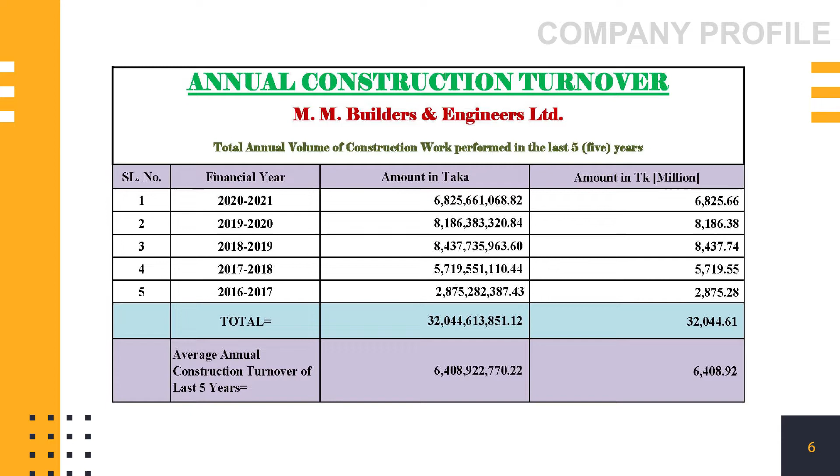Annual construction turnover: total annual volume of construction work performed in the last 5 years was 640 crore 89 lakh 22,770.22 taka, or 6,408.92 million taka. Working sectors include Roads and Highways Department (RHD), Public Works Department (PWD), Local Government Engineering Department (LGED), Bangladesh Bridge Authority (BBA).

Other working sectors: Bangladesh Water Development Board (BWDB), Rajdhani Unnayan Kortripokho (Rajuk), MES Bangladesh Army, City Corporation (CC), Bangladesh Inland Water Transport Authority (BIWTA), Chittagong Port Authority (CPA), Payra Port Authority, and Bangladesh Navy.

Experience of the firm in the field of large construction.

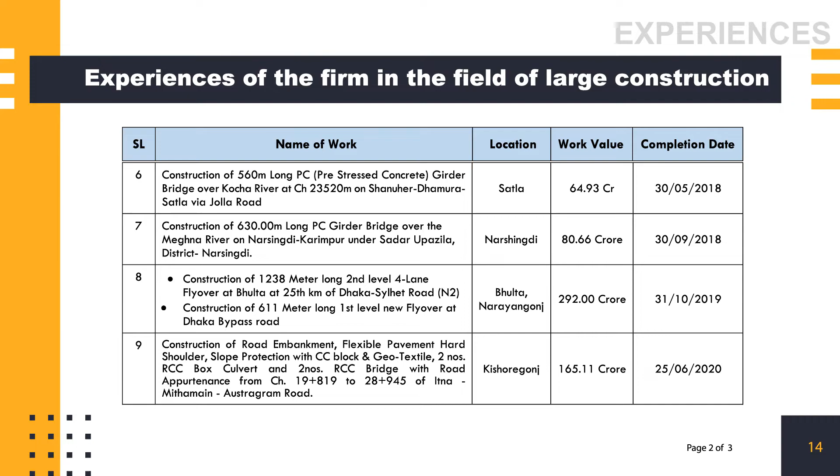Previous experiences for the construction of any types of large or small jetty and related works, including the construction of the damaged RCC jetty at Guptachhara, Sandwip.

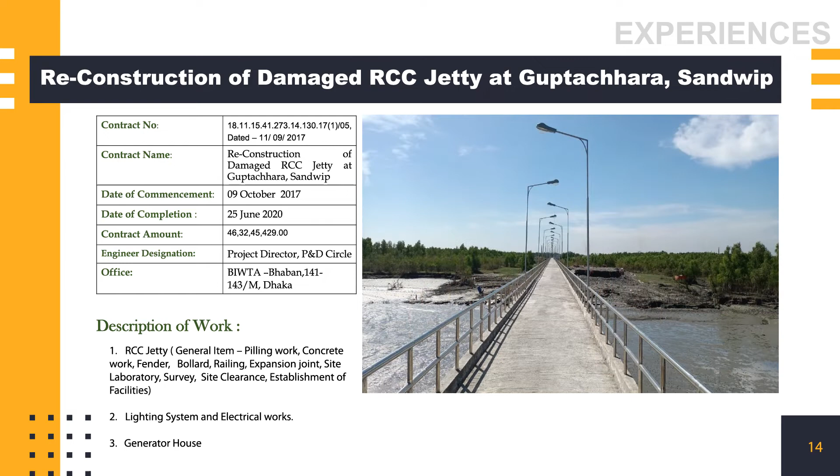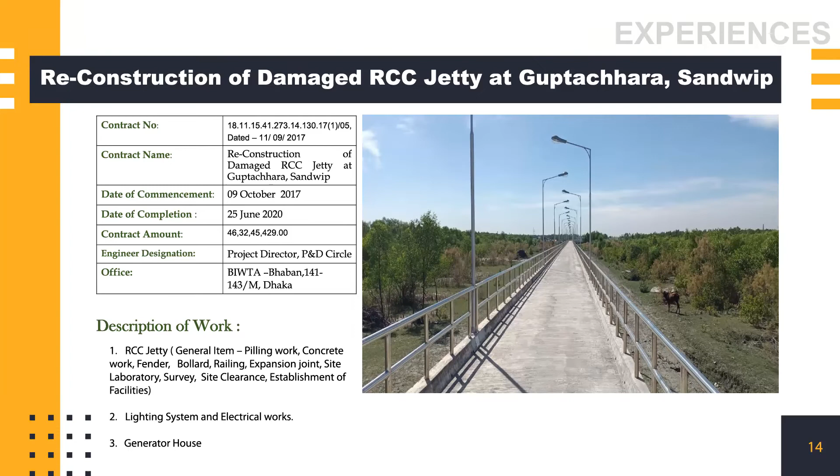RCC jetty works include: general items, piling work, concrete work, fender, bollard, railing, expansion joint, site laboratory, survey, site clearance, establishment of facilities, lighting system and electrical works, and generator house.

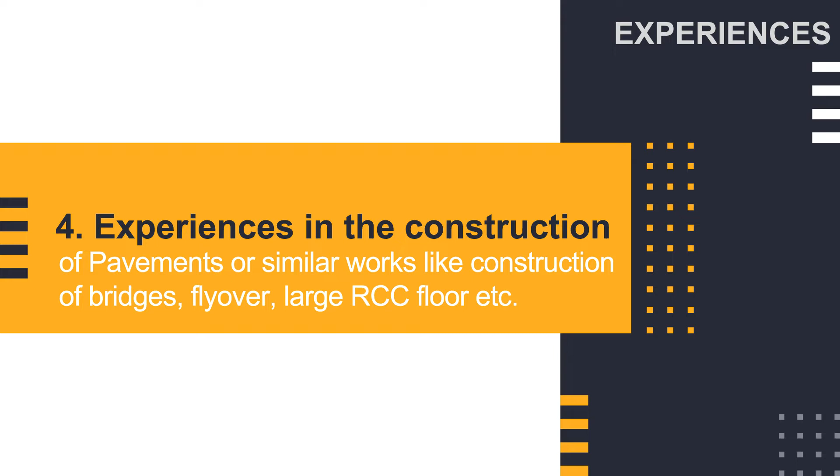Experiences in construction of pavement or similar works like bridges, flyovers, and large RCC floors, including the Payra 4-lane project: construction of the 4-lane Rajapara Payra Port connecting road for Payra Port Authority, Kalapara, Patuakhali.

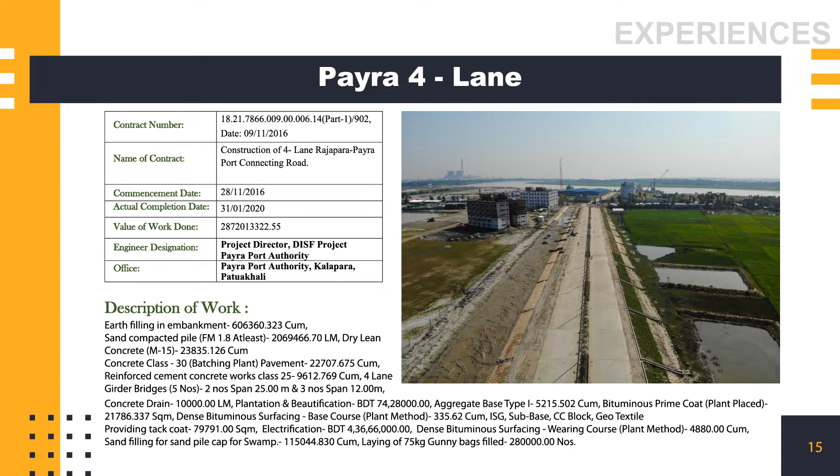Description of work: earth filling in embankment, sand compacted pile, dry lean concrete, pavement reinforced cement concrete C30 grade using batching plant, 4-lane girder bridges, concrete drain, plantation and beautification, electrification, and monument.

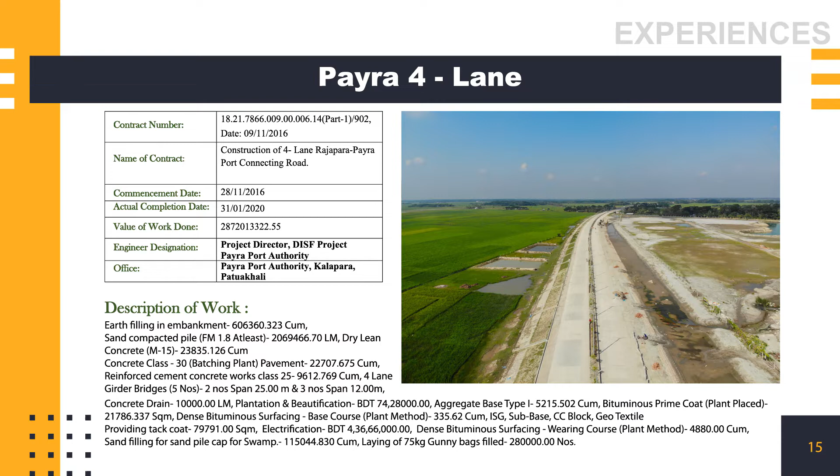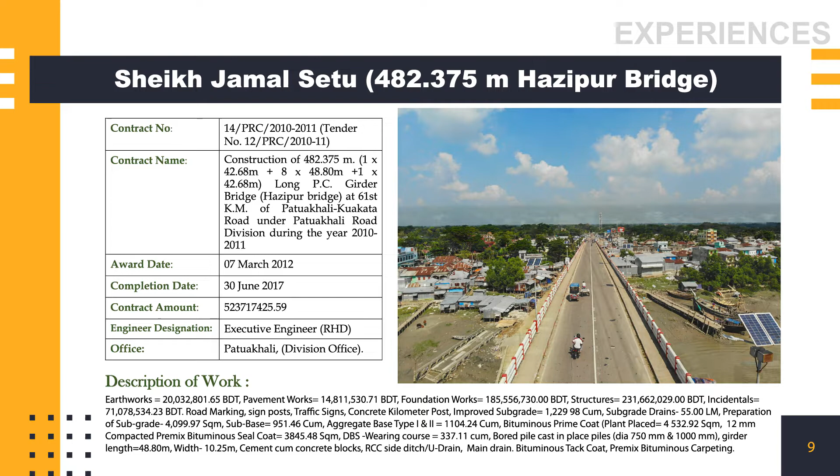Sheikh Jamal Setu: 482.375 meter Hazipur Bridge. Construction of a 482.375 meter long PC girder bridge, Hazipur Bridge, at the 61st kilometer of Patuakhali-Kuakata Road under Patuakhali Road Division during the year 2010-2011.

Major items: bored pile cast-in-place piles, diameter 750 mm and 1000 mm, girder length 48.80 meter, 10 spans, 157 piles, pile length 46 meter.

RCC drain work of 1271 linear meter, approximate concrete area 4900 square meter. Pile work executed using concrete batching plant, rotary drill rig machine and normal rig machine by percussion methods.

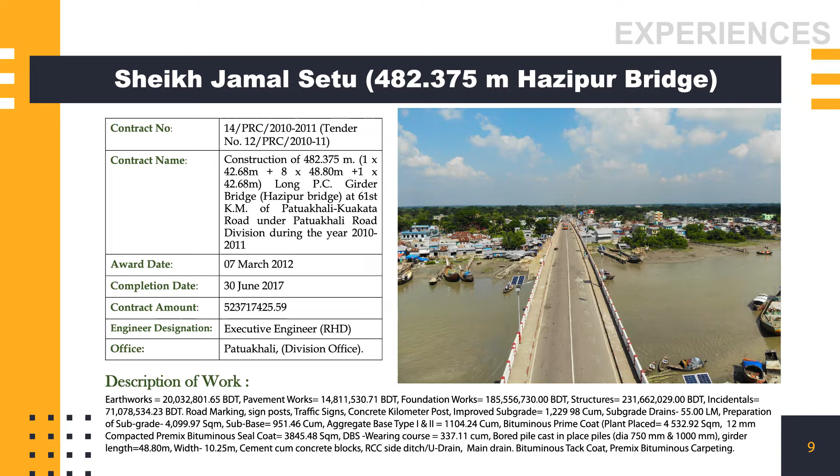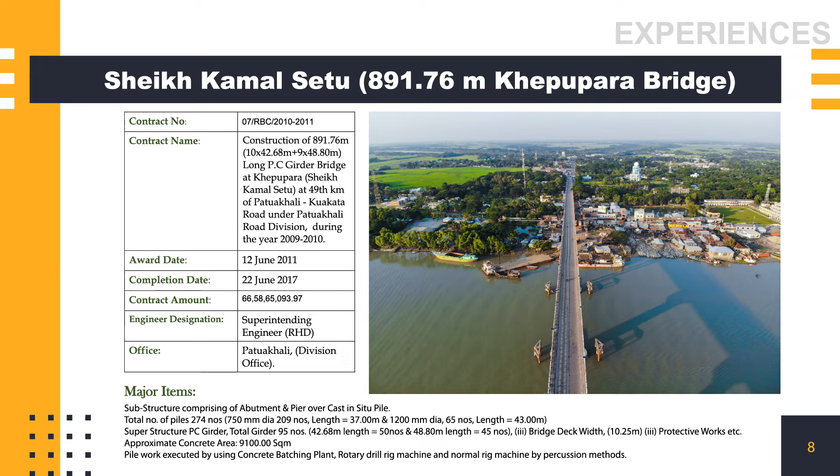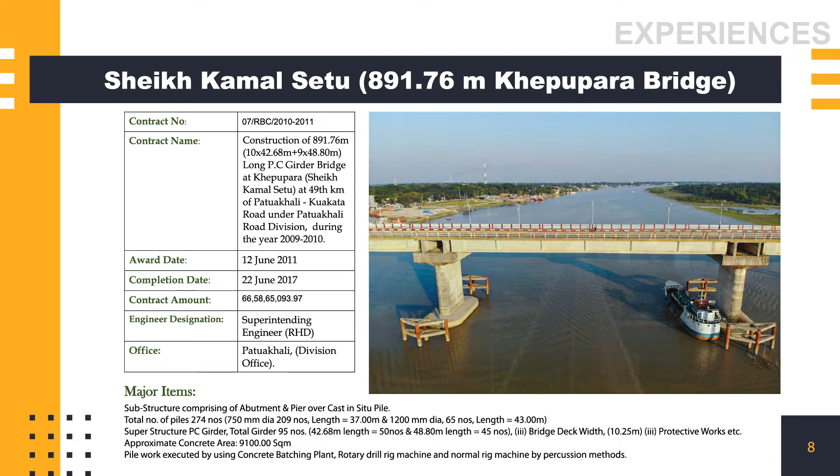Sheikh Kamal Setu: 891.76 meter Khepupara Bridge. Construction of an 891.76 meter long bridge, comprising 10 spans of 42.68 meter plus 9 spans of 48.8 meter long PC girder bridge at Khepupara under Road Division, Patuakhali, during the year 2009 to 2010, including protective work, approach and lighting.

Major items: substructure comprising abutment and pier over cast-in-situ pile. Total number of piles 274: 750 mm diameter, 209 numbers, length 37 meter; and 1200 mm diameter, 65 numbers, length 43 meter. Superstructure PC girder, total 95 girders: 42.68 meter length, 50 numbers, and 48.8 meter length, 45 numbers. Bridge deck width 10.25 meter, plus protective works.

Approximate concrete area 9100 square meter. Pile work executed using concrete batching plant, rotary drill rig machine and normal rig machine by percussion methods.

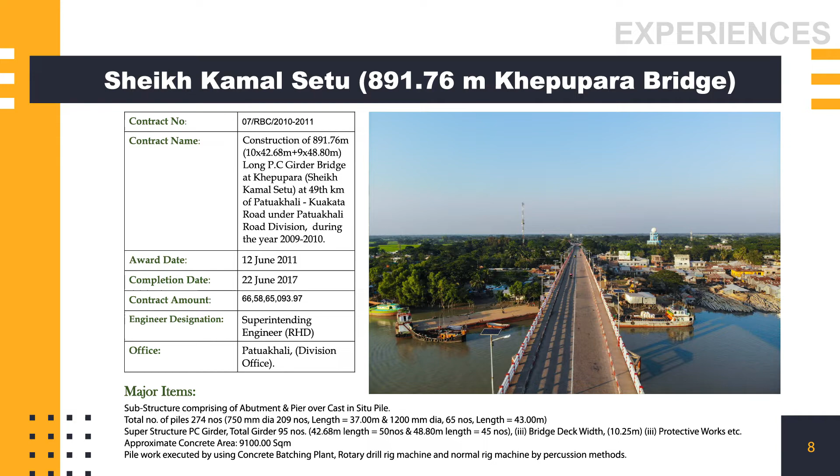560 meter Satla Bridge. Description of work: construction of a 560 meter long PC pre-stress concrete girder bridge over the Kocha River at chainage 23,520 meter on the Shanuher-Dhamura-Satla via Jolla Road.

Scope of work includes earthworks, pavement works, foundation works, substructure work, superstructure work with PC pre-stress concrete girder bridge, and incidentals such as RCC side ditch, U-drain, main drain, bituminous tack coat, and premix bituminous carpeting.

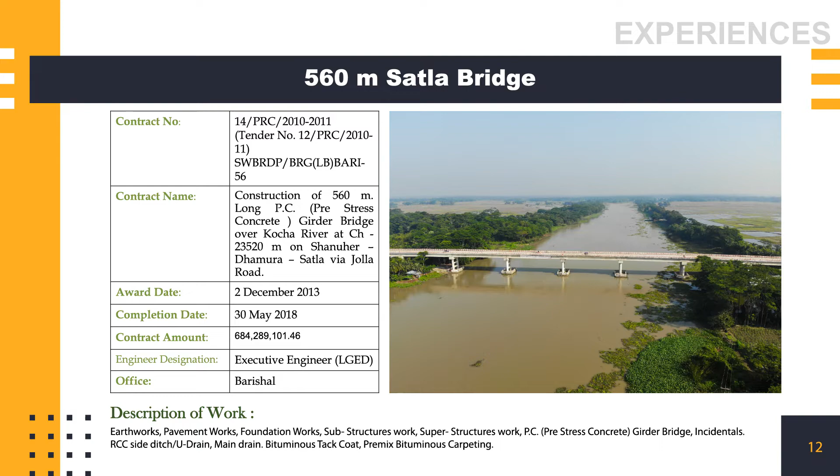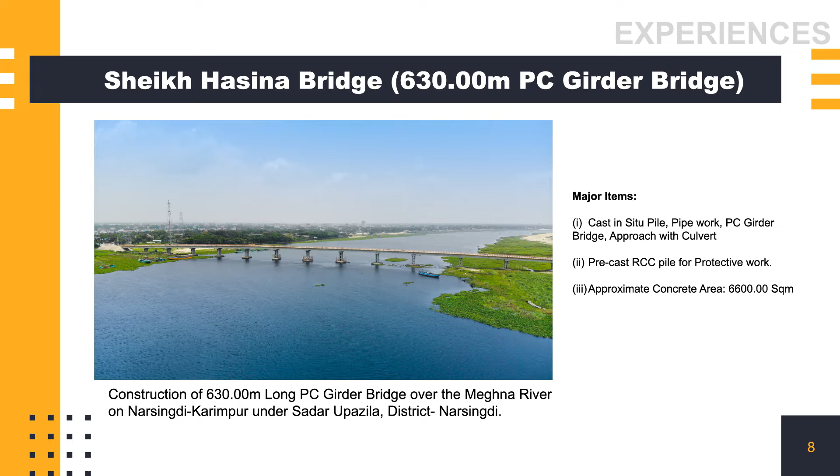Sheikh Hasina Bridge: 630 meter PC girder bridge. Construction of a 630 meter long PC girder bridge over the Meghna River on Narsingdi-Karimpur, under Sadar Upazila, district Narsingdi. Major items: cast-in-situ pile, pipe work, PC girder bridge approach with culvert.

Precast RCC pile for protective work, with approximate concrete area of 6,600 square meter.

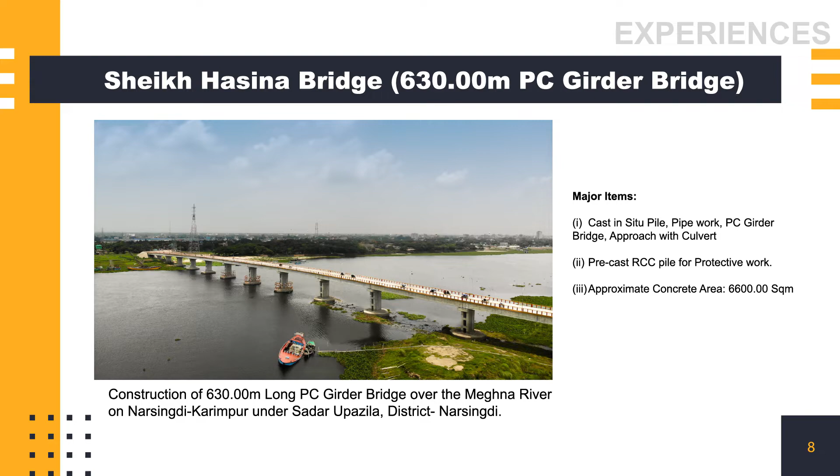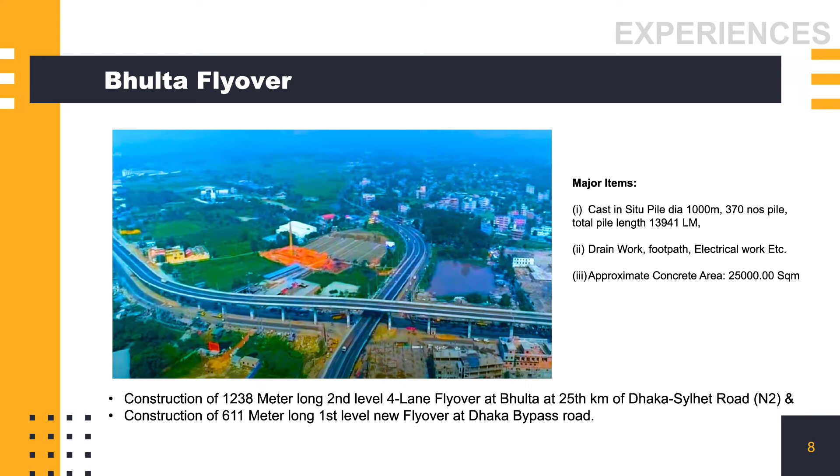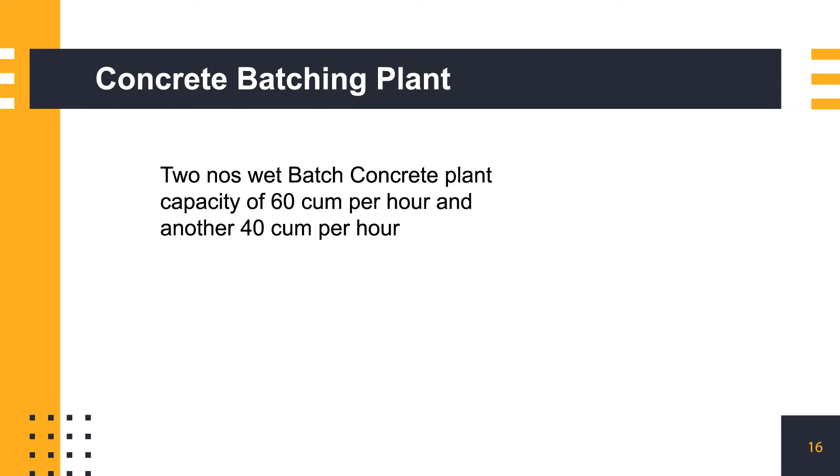Concrete batching plant types and capacity: 2 wet batch concrete plants with capacity of 60 cubic meter per hour and 40 cubic meter per hour respectively. Ready-mix concrete mixer trucks will be deployed for the project site.

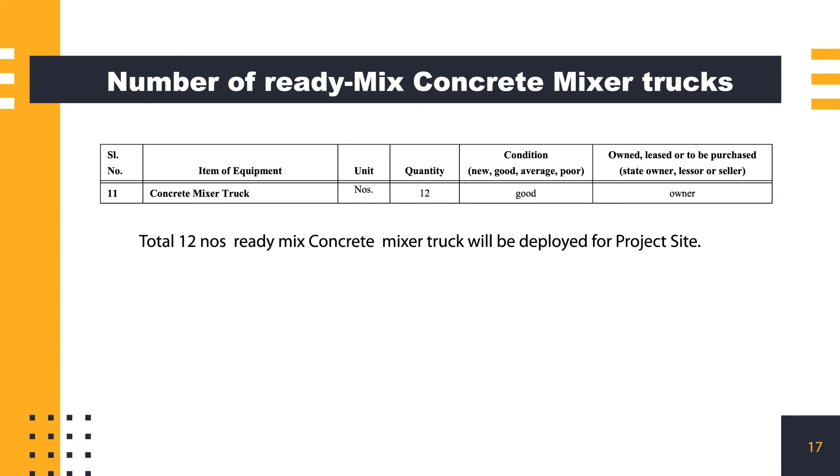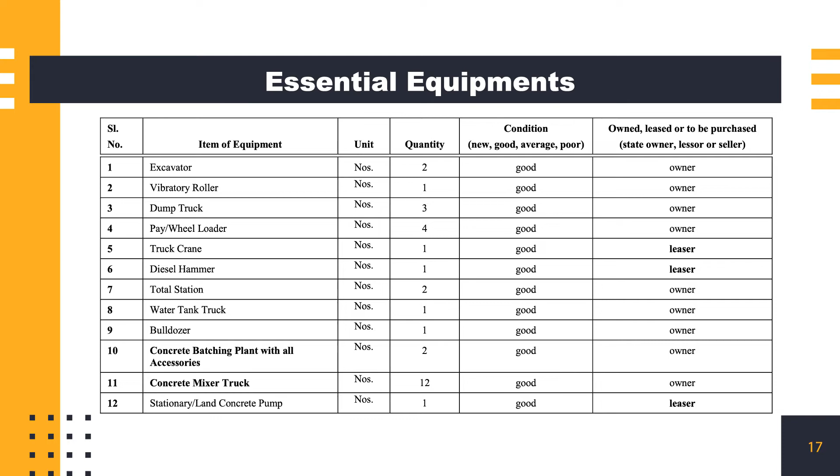Essential equipment required for the project works: excavator 2, vibratory roller 1, dump truck 3, wheel loader 4, truck crane 1, diesel hammer 1, total station 2, water tank truck 1, bulldozer 1, concrete batching plant 2, concrete mixer truck 12, stationary land concrete pump 1.

Mobile concrete pump 1, concrete mixture machine with hopper 2, concrete vibrator 4, form vibrator 6, generator 3, air compressor 2, electric rebar cutter 3, electric rebar bender 2, electric welding set 5, gas cutting and welding set 3, mud pump 2, surface finisher machine 3, HDPE pipe butt joint machine 2.

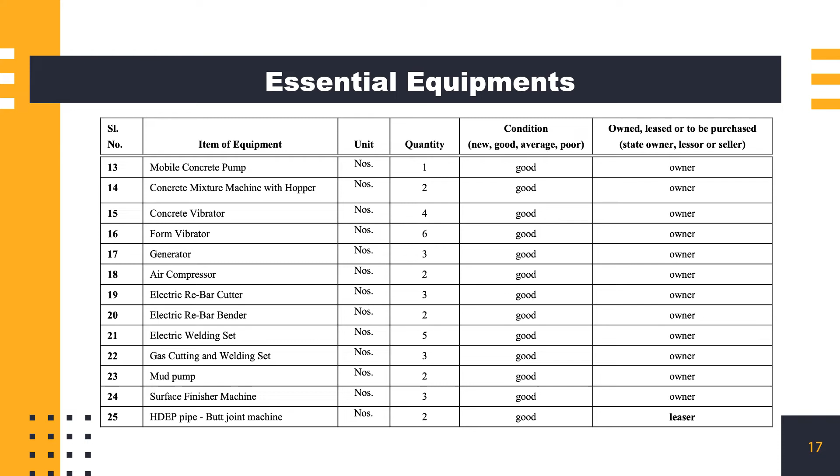Work methodology of the construction work for P11.

General description: Construction of Patenga Container Terminal (PCT) is one of the most important projects for the Chittagong Port Authority (CPA) under the Ministry of Shipping, Bangladesh.

Construction of the container yard and its supporting facilities will be implemented by appointing a contractor. MM Builders and Engineers Limited is one of the leading construction companies in Bangladesh. If selected as contractor for the above-mentioned work, it will engage required equipment and qualified manpower to ensure the quality, safety and timely implementation of the work.

Scope of work: high mast tower and lighting system, water supply and firefighting system, yard drainage system, continuously reinforced concrete pavement (CRCP).

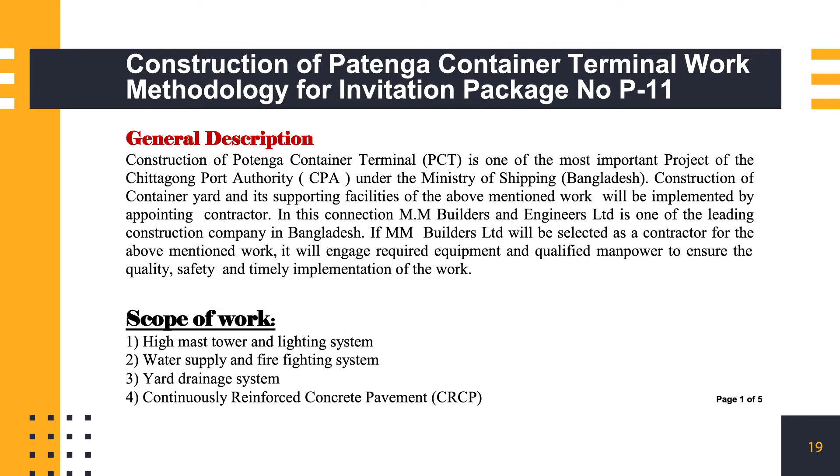Construction of cable duct and pile foundation for high mast pole under yard electrification work. Laying pipeline for water supply and firefighting system. Construction of surface drain, manhole pits and drainage outlets under yard drainage system. Construction of brick flat soling. Construction of lean concrete CRCP work.

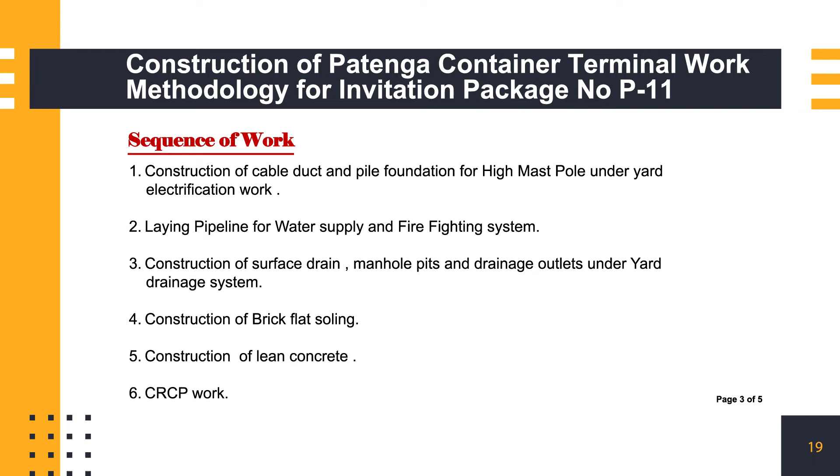Work procedure: mobilize required equipment, material and manpower for first stage work within 7 days. Then start construction of precast pile for high mast tower foundation; this will take 10 days. After 30 days from the date of completion, driving of precast pile will start and finish within 7 days. Total precast pile construction, driving and foundation work will complete within 60 days.

Manhole pits and pipe laying work for water supply and firefighting works will start simultaneously with the precast pile work, with the same days planned for completion.

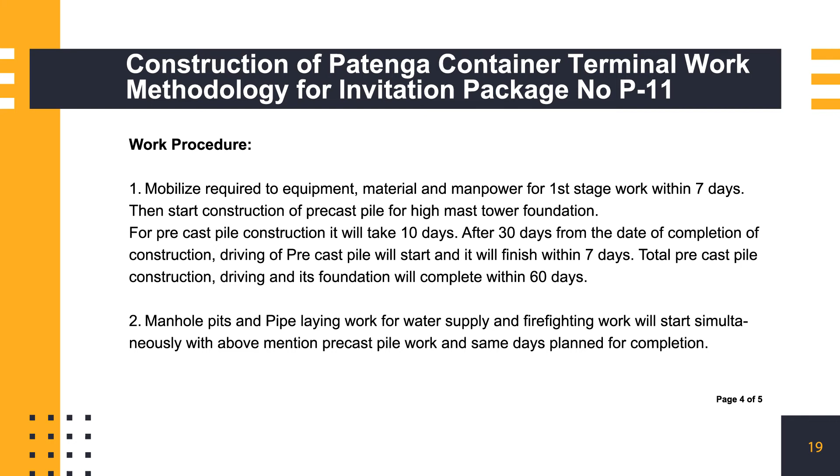After that, compaction and leveling work will start on the pipe laying part. Then surface drain work will start. Necessary measures will be taken to complete the work within planned dates.

After that, brick flat soling work will start with mortar filling between the gaps of bricks. Lean concrete work will start on the completed portion of the brick flat soling area. Necessary steps will be taken to complete within planned times.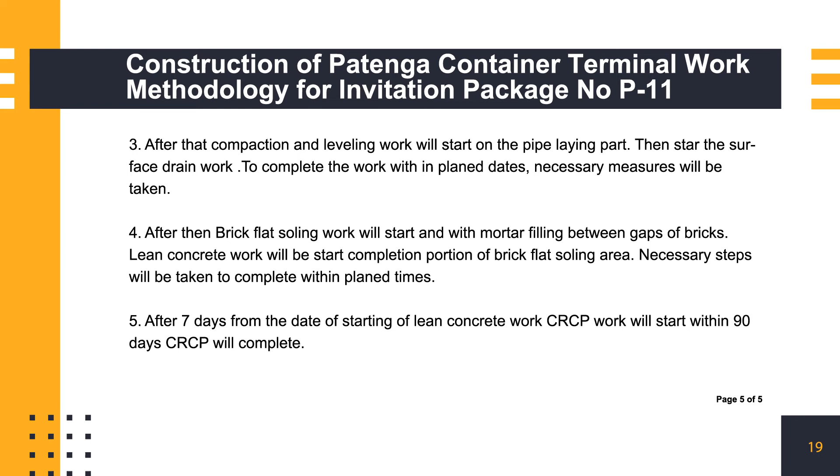7 days after starting lean concrete work, CRCP work will start and complete within 90 days. Time required for construction, quick construction capability, and work program.

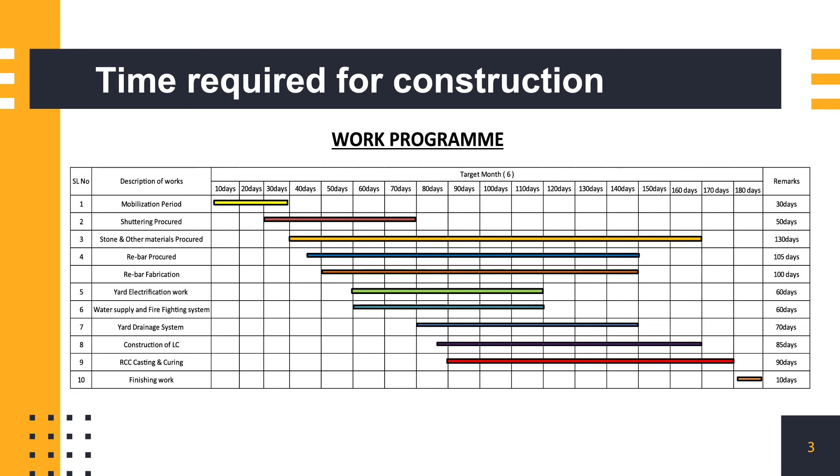Construction quality assurance measures.

Quality control measures: to ensure the quality of works, materials shall be tested in the project laboratory. The standards, methods and frequency of tests shall be followed as per specification. Tests that cannot be conducted in the project laboratory shall be done at BRTC, BUET, or other recognized institutions as directed by the engineer.

If test results of any material are found unsatisfactory, that material shall not be used. During construction, specified routine tests shall be done on completed works. Remedial measures shall be taken against any defective works to the satisfaction of the engineer or the engineer's representative.

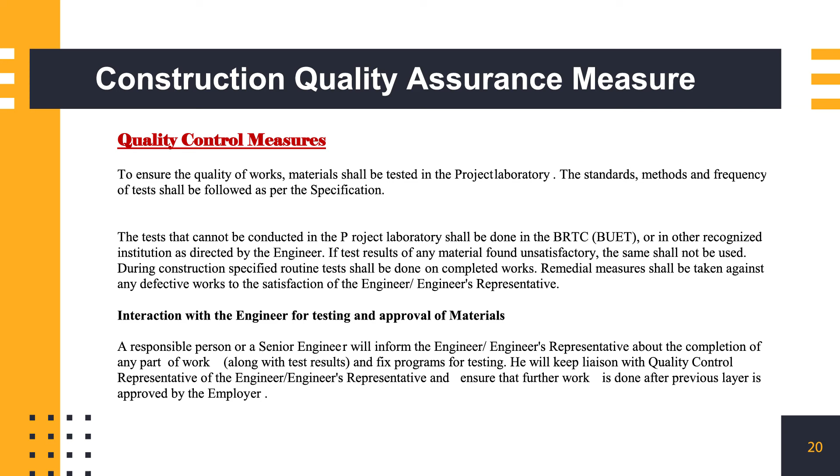Interaction with the engineer for testing and approval of materials: a responsible person or senior engineer will inform the engineer or engineer's representative about the completion of any part of work, along with test results, and fix programs for testing. He will keep liaison with the quality control representative and ensure further work is done only after the previous layer is approved by the employer.

Miscellaneous capabilities: health and safety measures, material purchase plan, etc.

Health and safety measures: health and safety on site will involve the following. A safe working environment will be maintained throughout the construction work. Adequate safety to life and equipment will be secured. Safe drinking water and hygienic food will be provided. There will be provision of first aid and medicines. Site latrines and washing facilities will be provided for all staff and workers to maintain a good working environment.

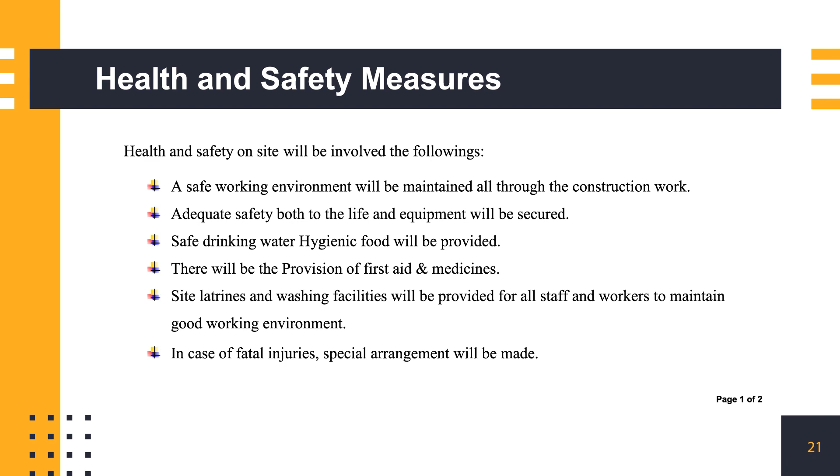In case of fatal injuries, special arrangements will be made. For minor injuries, treatment can be done by the contractor's competent first aid. For severe injuries, the injured person shall be transferred to our designated hospital. Adequate safety of drinking water will be established.

Insurance policy for all the workforce as well as equipment will be covered as per the condition of contract. Canteen facilities will be established to provide food for all. Adequate lighting will be arranged. We will provide safety clothing, helmets, boots and other safety gear, and ensure safe drinking water. Strong site discipline shall be maintained for all workers.